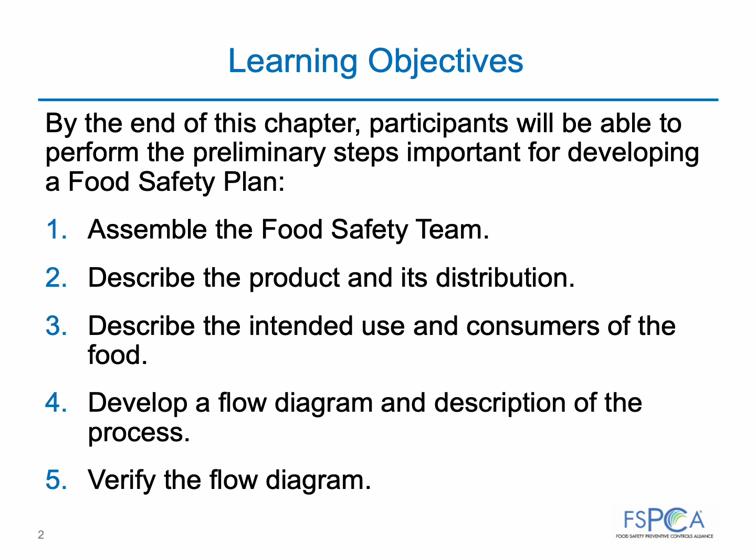Assembling a food safety team is an important step in building a food safety plan. Management commitment is extremely important to ensure that enough resources are dedicated to this effort. Effective food safety management not only protects the food, it also protects the business from the risk of a food safety incident or a regulatory noncompliance issue.

To develop and implement an effective food safety plan, a budget, resources, and support for change management, potential changes in equipment, and new procedures may be required. Without management commitment at all levels, it may be difficult to implement an effective food safety plan. Top management commitment to food safety sends a strong message to all personnel that the food safety system is vitally important to the company.

Although one person may be able to analyze hazards and develop a food safety plan successfully, many companies find it helpful to build a food safety team. When only one person develops a food safety plan, some key points can be omitted or misunderstood in the process. The team approach minimizes the risk of missing key points or misunderstanding aspects of the operation. It also encourages ownership of the food safety plan, builds company involvement, and brings together people with different areas of expertise.

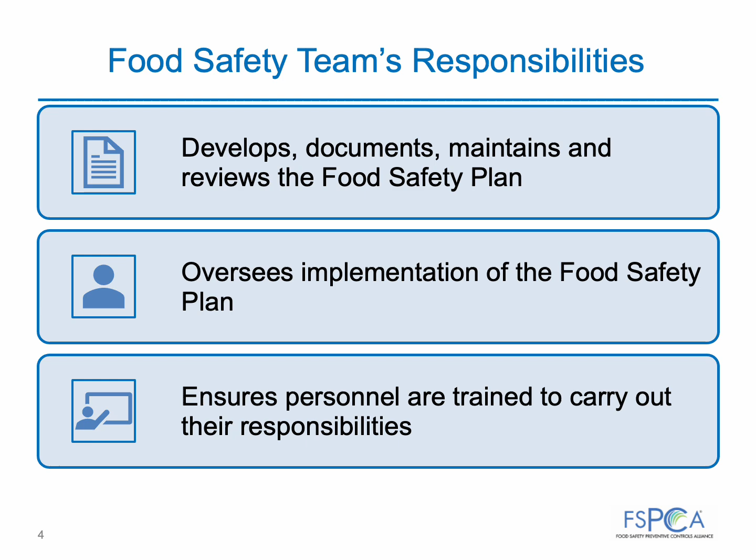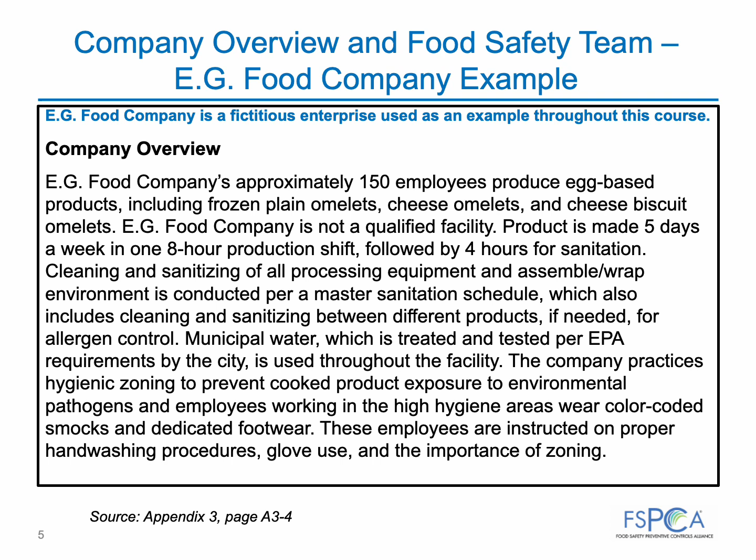E.G. Food Company's food safety team consists of 4 employees: the plant manager, I.N. Charge, the quality assurance manager, FS Leader, the production supervisor, E.F. Ency, and the sanitation supervisor, IM Clean. All have undergone food safety training and use references such as FDA guidance documents.

Additionally, an external food safety consultant, PH Books, has been brought in by the E.G. Food Company to assist with the development of the food safety plan. The consultant may be tasked with ongoing work such as performing the annual review of the food safety plan, as well as making any needed modifications to the plan.

The facility collected input for the sanitation program from the sanitation chemical supplier and included aspects such as the appropriate cleaning and sanitation compounds, as well as proper procedures for its sanitation procedures. As a reminder, documenting the food safety team members is optional and not required by the preventive controls for human food regulation. Appendix 3, in the chapter Resources, Food Safety Plan, Teaching Example, contains a full food safety plan, which will be used for examples throughout the course.

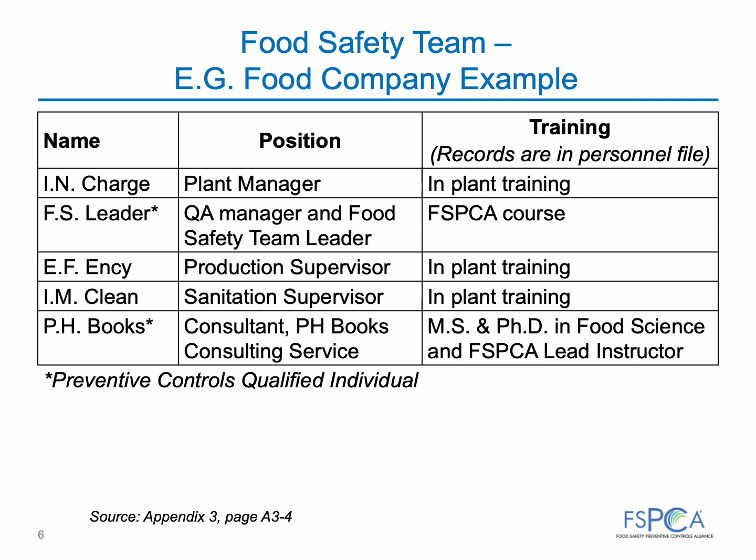Understanding basic information about a product and its distribution helps to determine what specific food safety controls are necessary through the distribution cycle. The food safety team should describe the product's food safety characteristics, ingredients used, the type of packaging, shelf life expectations, and the methods of storage and distribution.

Information on intrinsic properties of products or factors that can influence the growth of pathogens, e.g., pH, water activity, preservatives, if any, is important. Along with this, an understanding of how these elements impact food safety with regard to potential food safety hazards that may require preventive controls.

A product description form is a helpful record to capture product and distribution information. Appendix 2 in the chapter Resources contains template forms for review and use. Other formats may be used, rows may be deleted, and a simple paragraph format is also acceptable. The preventive controls for human food regulation does not mandate capturing this information.

However, the information contained in this form can be useful to provide an overview of the product to an independent auditor, e.g., when an audit is required by a customer, or a food safety consultant who is helping the food safety team to develop a food safety plan. The information contained in this form may also be useful if a recall is needed. Additional details on recalls can be found in Chapter 15, Recall Plan for Human Food.

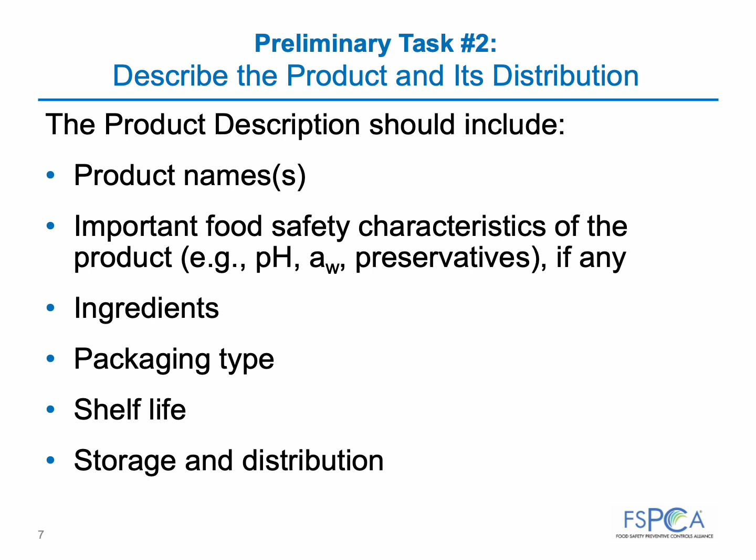Intended use of the product refers to its anticipated use by end users, e.g., other food processors, consumers, etc. Most foods are likely to be intended for the general public. The food safety team should consider these questions. 1. What is the intended use of the product, e.g., retail, food service, further processing? 2. What is the potential for mishandling by the consumer and unintended use by them? 3. What handling and preparation procedures are required of the end users? For example, is the product ready to eat, or does it require further preparation such as reheating, cooking, etc.?

4. Who are the intended consumers of the product? 5. Is the product intended specifically for use by immune-compromised individuals or other susceptible groups? Answering these questions provides valuable information for the food safety team as they proceed to the hazard analysis. See Chapter 6, Hazard Analysis.

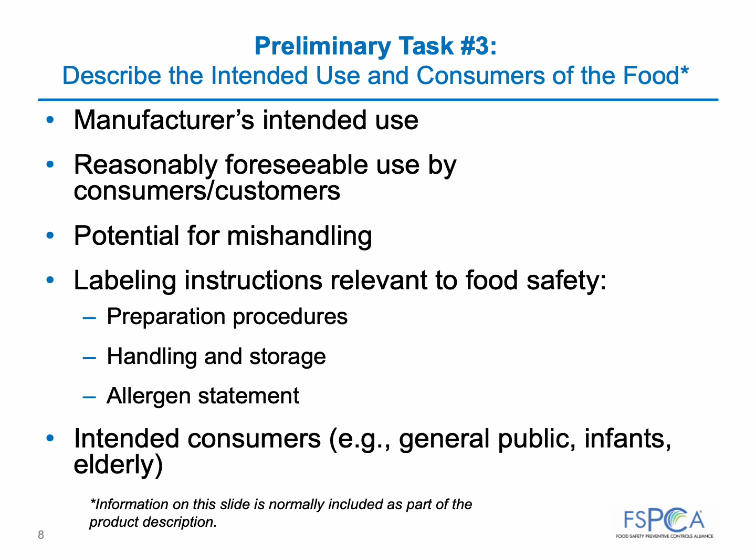Intended consumers may be members of the general public or a specific segment of the population that is more sensitive to certain hazards, typically referred to as at-risk or susceptible populations. These groups include infants and young children. Infants and young children do not have a fully developed immune system and are more likely to develop certain types of foodborne illnesses, such as infections by bacterial pathogens. Choking hazards from the food itself or packaging material, e.g., small caps, may also be a concern for this group.

Elderly persons. As people age, their immune systems naturally weaken. Elderly persons tend to be more susceptible to infections by foodborne bacterial pathogens than the general population, and illnesses may also be more severe.

Pregnant women. Some pathogens, such as Listeria monocytogenes and Toxoplasma gondii, are particularly harmful to the developing fetus. Manufacturers of foods targeted specifically toward pregnant women should control potential sources of these pathogens.

Immune-suppressed persons. Other factors can weaken the immune system. For example, persons who are HIV positive, have had organ transplants, are undergoing chemotherapy for cancer, or who regularly take acid reflux or immunosuppressive drug therapies, are particularly susceptible to developing illnesses caused by foodborne pathogens.

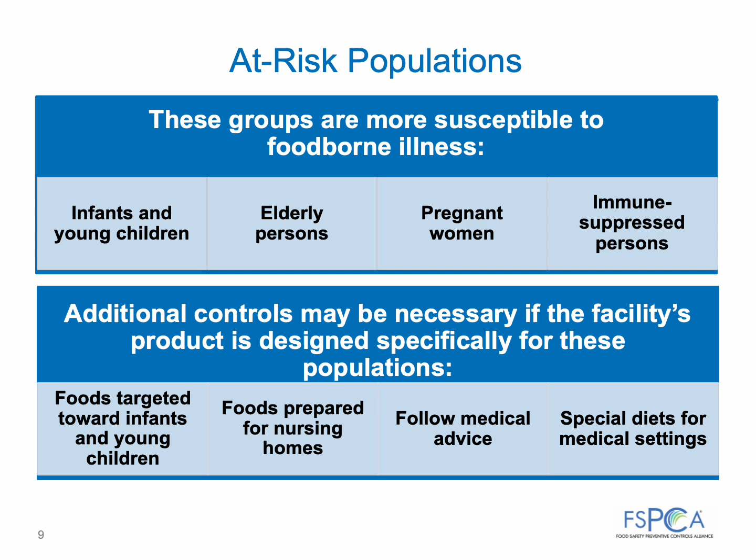Elements of a complete product description and intended use form: product names, may include more than one product with similar processing and hazard profile. Product description, including important food safety characteristics. A general description of the product and processing method, assembly, and group or type of products included in the category. If it is relevant to product safety, intrinsic properties like preservatives, water activity, and pH should be listed here.

Ingredients. Simple listing of ingredients, including processing aids, which may be grouped or transferred from the product label, if convenient. This could also be an attachment, a list or a recipe, or reference ingredient specification numbers, which would provide more detailed information. Packaging used. A general description of the packaging, including method or type, such as hermetically sealed container, modified atmosphere, or vacuum packaging if used. This may impact the hazards of concern.

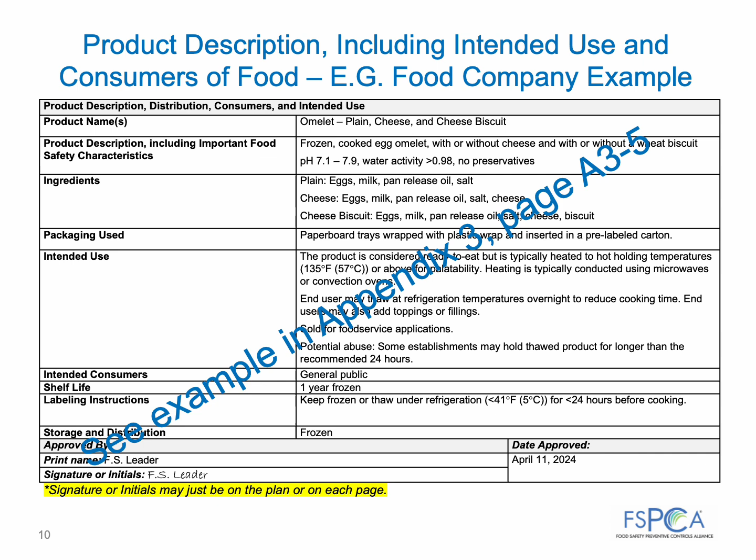Shelf life: list intended shelf life, if relevant to potential microbial growth or age-induced toxin formation. Labeling instructions: include label instructions relevant to food safety. This may include refrigeration, cooking instructions, etc., if relevant. Storage and distribution. Lists the method of distribution, e.g., refrigerated, frozen, ambient.

A flow diagram provides an important visual tool the food safety team can use to describe the process. When developing a process flow diagram, it is important to include all the process steps within the facility's control, from receiving ingredients and packaging through final product storage, including the use of water and ice as an ingredient, rework, in-facility manufactured ingredients, and diverted byproduct, if applicable.

Each process step should be considered in detail and the information expanded to include all relevant process information. Information may include all ingredients and packaging used, where raw materials, ingredients, and intermediate products enter the flow, the sequence and interaction of all steps in the operation, including in-facility manufactured product, if applicable, and alternate processes that could be used. An example of substitute equipment or seasonal production could be the use of fresh produce when it's available in season, then reverting to frozen when it is not available.

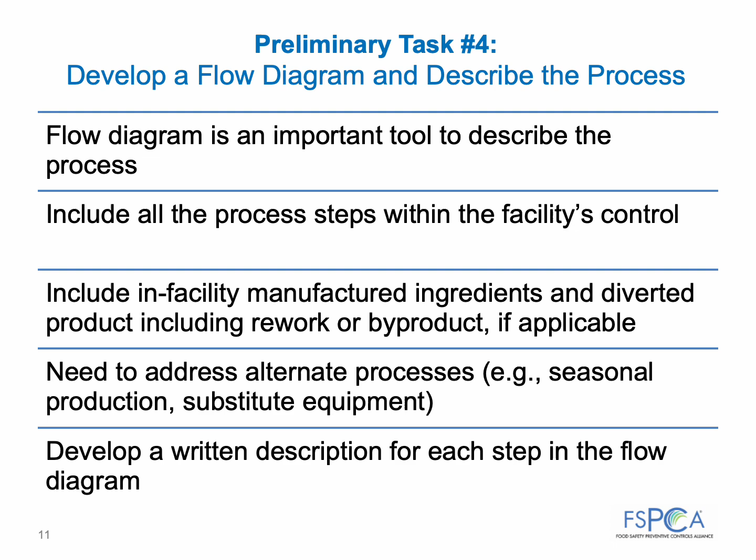Where product reworking and recycling take place in the process, and where product is diverted to waste or rework, if applicable. An example in dairy processing is the flow diversion valve, which reroutes improperly pasteurized product back to the beginning of the heating process. The product flow diagram for the EG Food Company omelet example appears on the next slide.

The EG Food Company's product flow diagram shows the receipt of their ingredients and packaging, as well as the storage of the ingredients and packaging. Each processing step is outlined in the flow diagram, showing the crack eggs and mix step, cook step, omelet assembly, wrap step that includes the post-process addition of the ingredients, cheese and biscuits, spiral freezing, metal detection, and packing into pre-labeled carton, after which the product is placed into frozen storage and finally distributed under frozen conditions. Each step shown in the flow diagram will inform the hazard analysis process.

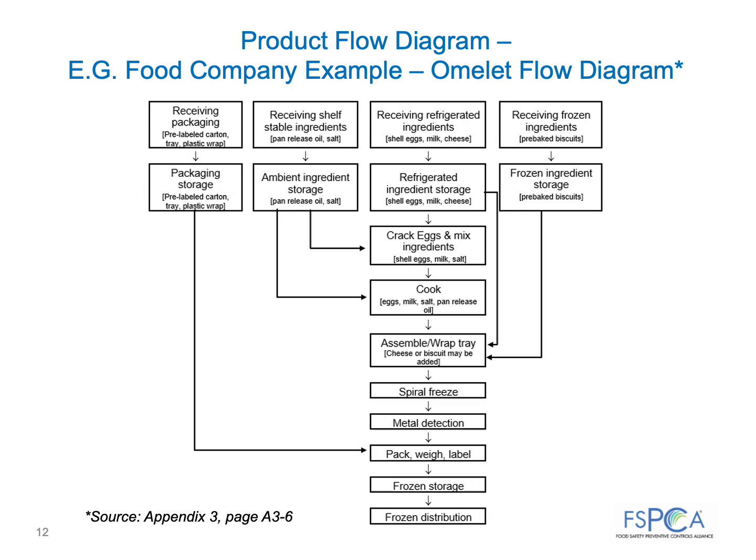A written process description is useful to explain what happens at each of the process steps and can contain more detail than the flow diagram. This description can be used as a working reference for the development of the food safety plan, particularly the hazard analysis.

The food safety team may already have other documents that contain similar information, such as product specifications, recipes, or work instructions that can be used in place of the description illustrated in this chapter. It is important to know what occurs at each process step.

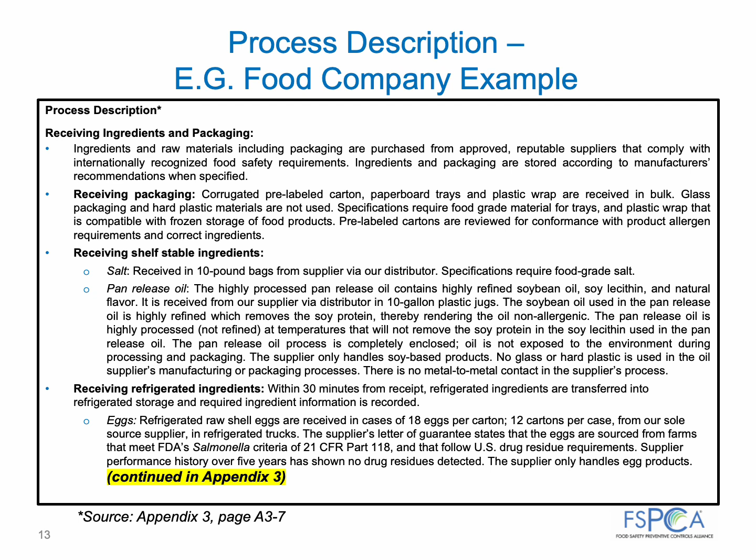For example, information which may have an impact on food safety, such as the maximum length of time that the product could be exposed to unrefrigerated temperatures, the maximum room air temperature, or the internal product temperature after a process is important to know for an accurate hazard analysis. The beginning of the process description from the e.g. food company example appears above. See Appendix 3, Food Safety Plan, teaching example for the full process description.

The steps in the flow diagram are used to organize the hazard analysis and determine preventive controls, which are discussed in Chapter 6, Hazard Analysis, and Chapter 7, Preventive Controls Determination. Since the accuracy of the process flow is critical to conducting a hazard analysis, the steps outlined in the chart should be verified at the facility. If one step is missed, a food safety hazard requiring a preventive control may be missed.

Include every handling, processing, and holding step for the product, as well as ingredients and packaging. The food safety team should walk through the facility and make any changes required in the flow diagram. At the same time, the team should make observations related to sanitation, potential for cross-contamination or allergen cross-contact, and potential harborages or introduction points for environmental pathogens. The walkthrough allows each team member to gain an overall picture of how the product is made.

It may be helpful to invite additional plant personnel to review the diagram during the walkthrough. Many times, operators can identify issues that may be overlooked by management or the food safety team. The complete verified flow diagram should be retained and periodically evaluated as a food safety record and as part of the food safety plan. A signature or initials is used to indicate that the flow diagram has been verified.

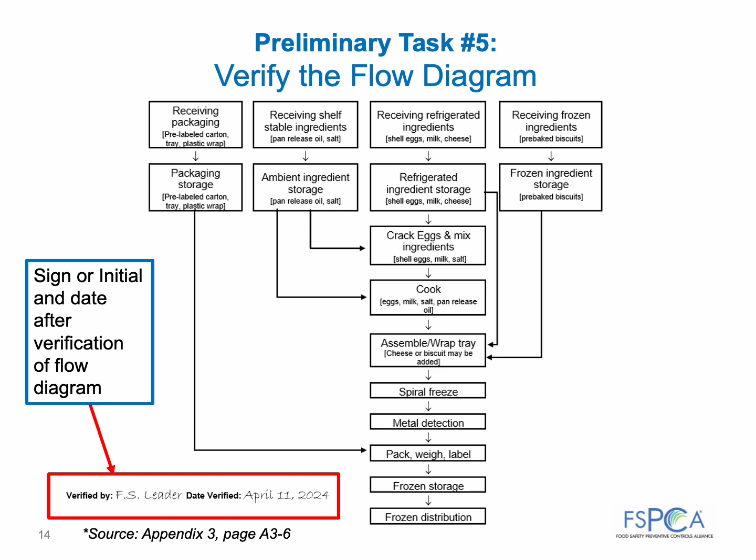It is important to have the right people in place and information available on the ingredients, packaging, and processes used before applying preventive controls principles to develop a food safety plan. Preliminary steps include: 1. Assembling the food safety team and ensuring that there are multidisciplinary perspectives who can provide appropriate expertise into the process. The goal is to get varied input to help ensure an accurate assessment of the food safety hazards that exist for the products being produced.

2. Preparing an accurate description of the product and its distribution to understand the characteristics of the product and ensure that potential hazards are not overlooked. 3. Identifying the intended use and consumers to ensure that preventive controls used will protect the safety of consumers during intended use and acknowledge potential misuse of the product, as well as ensuring that potential hazards are not overlooked.

4. Creating a process flow diagram that provides the organizational framework for conducting the hazard analysis, which identifies preventive controls to prevent food safety risks for the consuming public. And 5. Verifying the flow diagram and operational conditions to avoid overlooking sources of potential hazards.